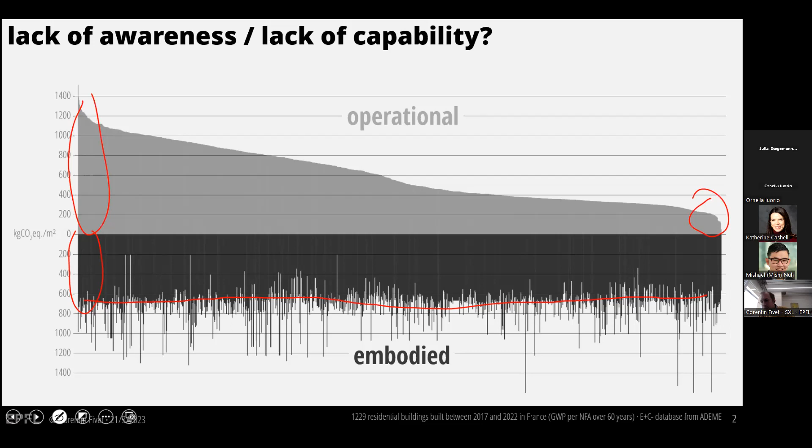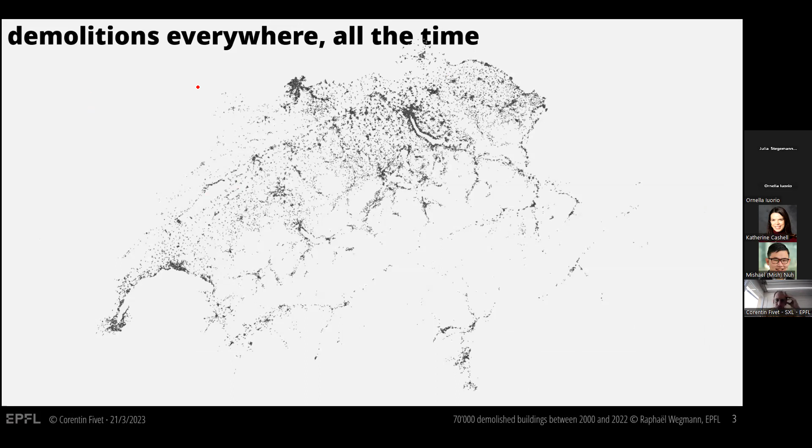We are demolishing buildings for various reasons, all the time, everywhere. This is just a map of all demolitions that happened in the past 20 years in Switzerland, which accounts for 70,000 buildings. And the big issue with those demolished buildings, besides the fact that, of course, it generates waste, and that's becoming an issue.

What's annoying with those demolitions is that we are demolishing those buildings because we don't need them, not because the materials have degraded. So we don't need the space those buildings offer at that location at that point in time anymore, but the materials are still of very good quality.

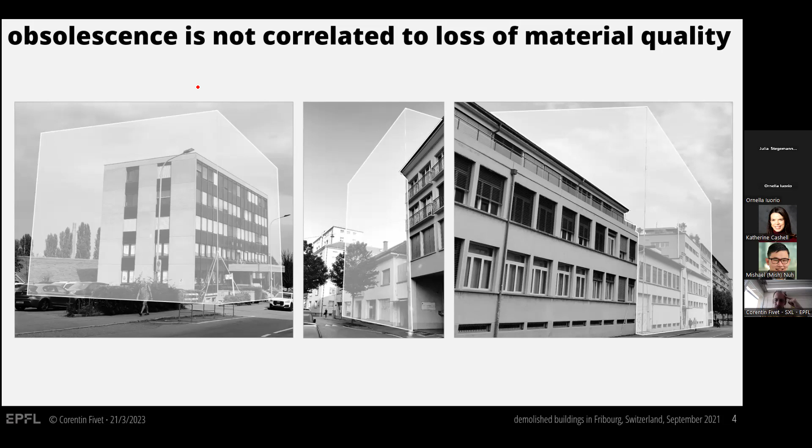The slabs, the beams, the columns could still perform for a longer time, and that's the main issue addressed through reuse. Since you work on circularity, you know what I mean here—it's not about recycling and remanufacturing a new material out of existing waste. It's really about reusing the components, the pieces, as they are given.

Here is just an example showing that. It's a bridge that was built in 1810. A century later, the city decided to replace it with a bigger, taller, wider bridge. A few months later, monks from the village nearby reclaimed the posts and beams from this bridge. Those posts were reclaimed to build the barn we see at the bottom of these slides.

If you look at the cuts in the columns, those are the precise cuts that were needed once the posts were in the bridge. That was a few months later, and this barn is still standing today and still in use. So what we have today is a 100-year-old building made with 200-year-old components.

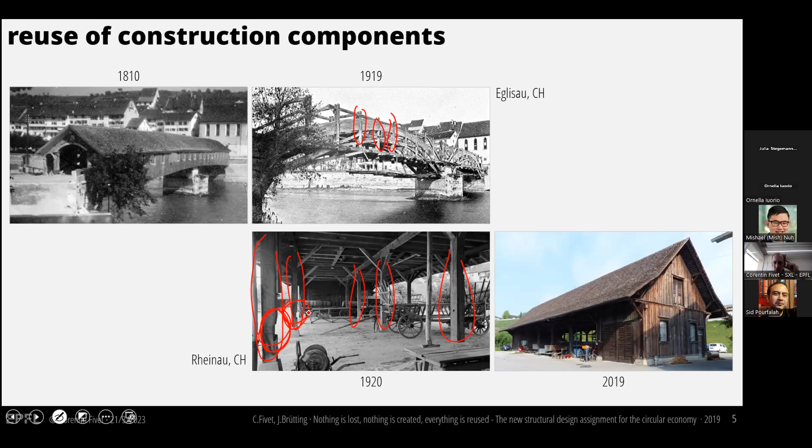And that's really the spirit of reuse—to have building materials that last longer than the buildings they are part of. We know the space requirements evolve over time, so there will be a need to transform, demolish, replace, or adapt buildings, but that's not an excuse to discard the materials inside those buildings.

So here are some close-ups with those marks. It's also very interesting in terms of heritage, because we can actually see the traces of previous uses, and the materials tell a new story, a different story that goes beyond the lifespan of the building.

When you reuse, of course that brings a few environmental benefits, and here are just a few of them. We've shown with recent studies in our lab, and other researchers have found similar numbers, that reusing components can save up to 70% of greenhouse gas emissions compared to a new product—especially true for load-bearing components, the heavy, large ones.

Reuse in Switzerland could also avoid up to 40% of waste. It's only 40% because 50% of that waste is actually soils moved from one site to another—those are not reused, and that's why it's 40% here and not 80%.

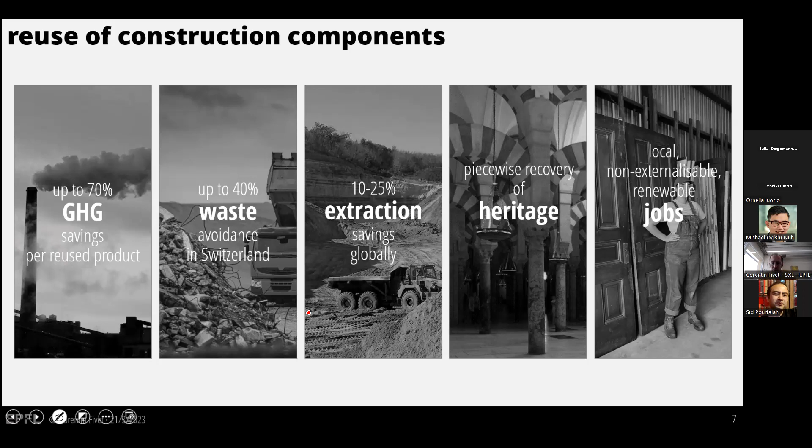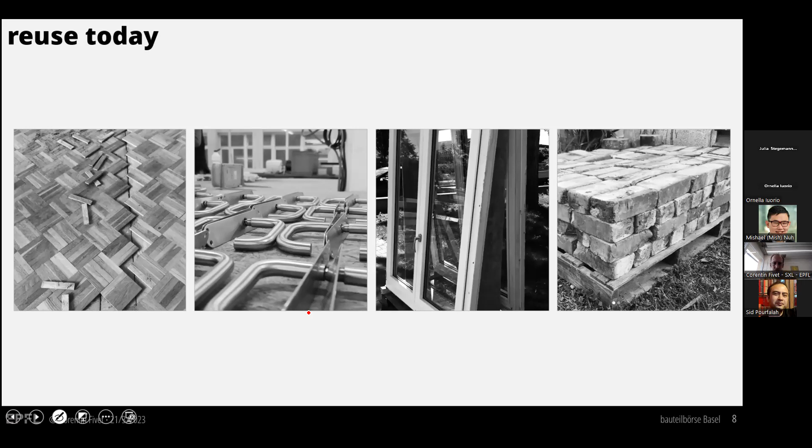Today, reuse in architecture mainly considers non-load-bearing components, the easy materials to reuse, but those are not the materials that will allow us to save CO2 emissions. If we really want to reduce CO2 emissions, we need to reuse load-bearing components.

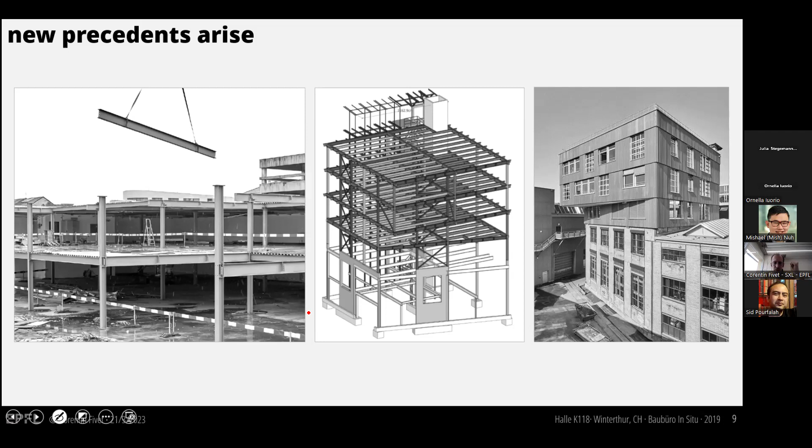There are more and more examples of applications, but it's still a niche practice. Here is an example of an extension done 2-3 years ago in Switzerland, where the full steel structure has been reused for the extension. In the structural exploration lab that I'm leading at EPFL, we are working on showing how reuse could be more implemented and also optimized.

We look at it from a design point of view, because for designers, reuse implies a change of paradigm. In conventional design, designers would first start with the shaping of a general form of the structure, and then little by little, after subsequent structural analysis, have a precise understanding of what should be manufactured and with what properties.

So what should be the lengths, the materials, the compositions of the materials in the structure. Now, if we start from a stock of materials to reuse, the story is different, because the materials are given. We know the geometric properties of the materials, we cannot change the materials, and their mechanical properties are given. So the design challenge now is to find the best structural shape that would reuse those components.

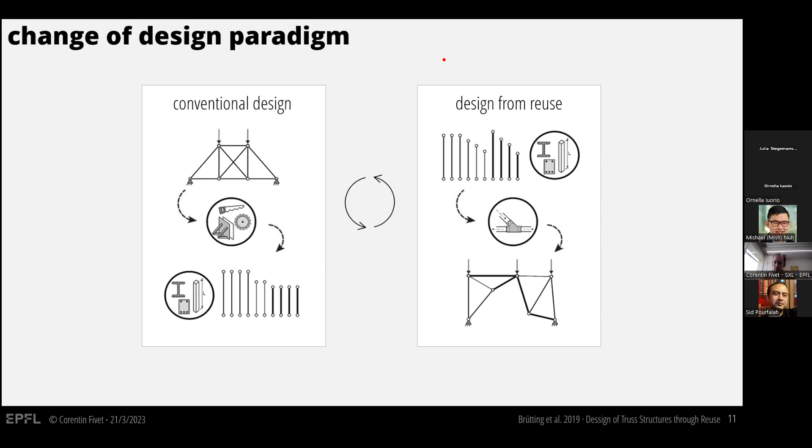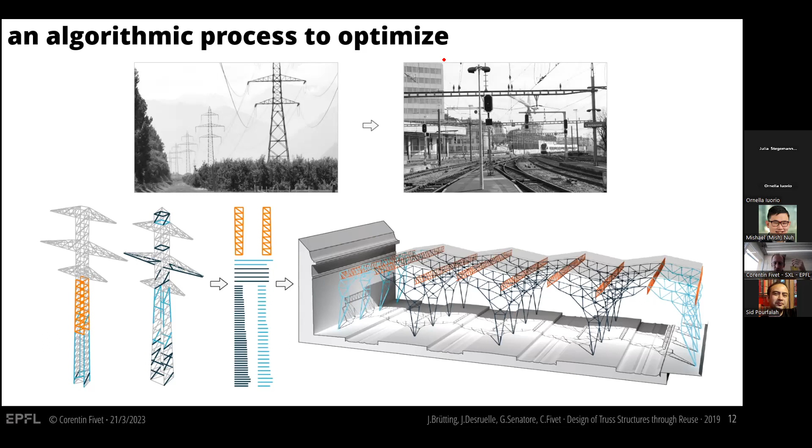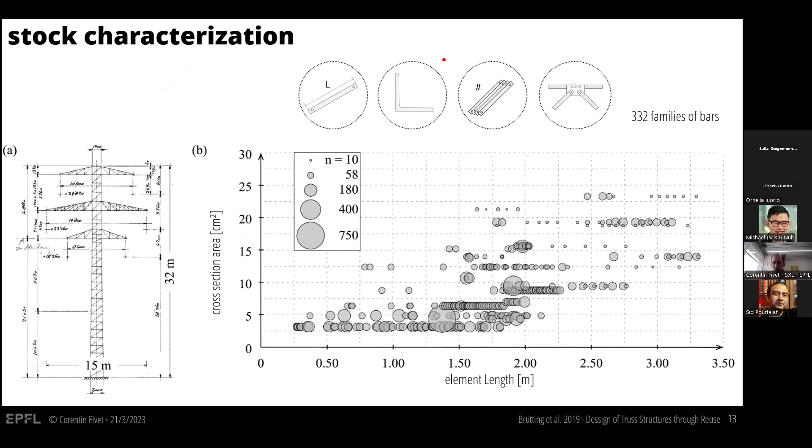All this could be transformed and written down in a mathematical way, and so could be optimized, which is actually useful because in reality, every time we are reusing, the pieces that we can reuse come from are very diverse. So it's not like we have 200 times the same components.

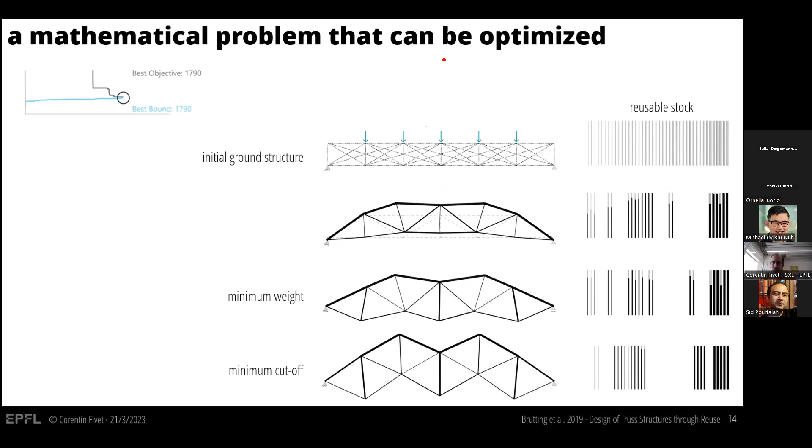As I said, the problem could be optimized, and we applied regular optimization algorithms that we actually adapted to the question of reuse. So starting from ground structures, we can optimize for minimum weight, but also for minimum cutoff of the members - how to minimize waste, for instance, but also how to minimize CO2. Those are algorithms that can be used for trusses, but also for frame structures like this one.

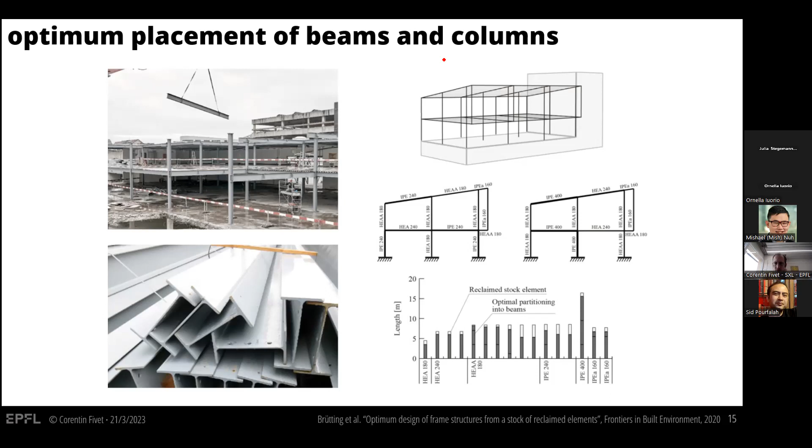What's interesting is that all the time, in all case studies that we are implementing, we are always showing huge environmental impact reductions - in a range from 40 to 60% compared to, for instance, if the structure was in steel, compared to recycled steel.

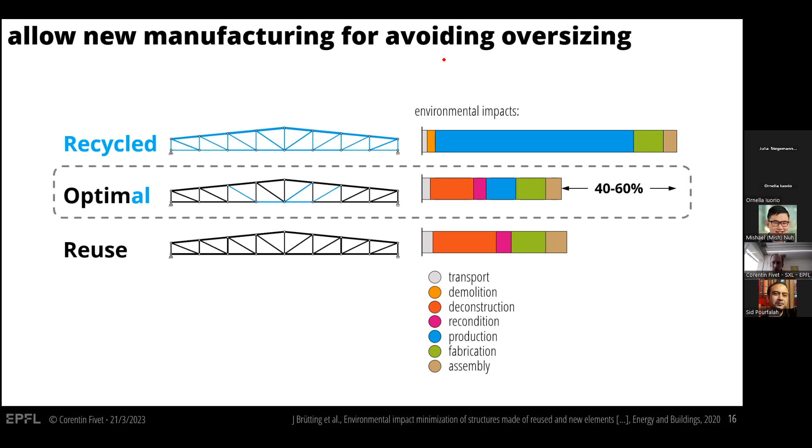What this graph here is showing is that if we really want to reduce the environmental impact to a minimum, the goal cannot be to reuse 100% of the members - we should allow some members to be manufactured for their proper use. The reason is that when we reuse, we cannot optimize the cross sections, so every cross section is a bit oversized, and that increases the weight. It's not optimum for transport either, so those members that are too oversized should be replaced with newly manufactured material.

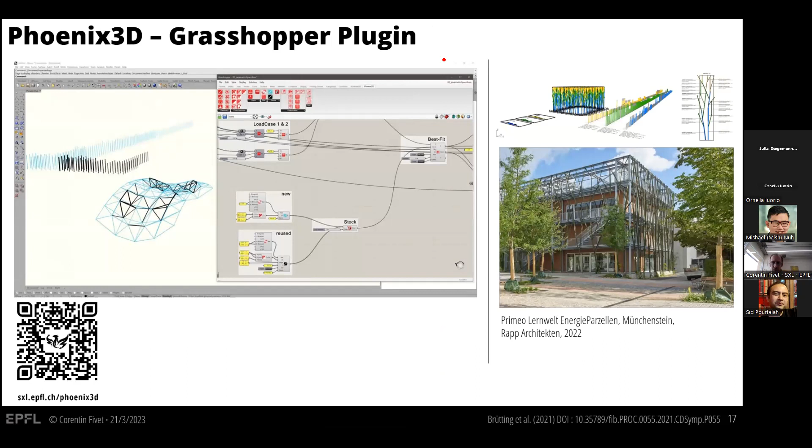All right, so the second part of this presentation is about concrete. It's the big elephant in the room. Production of cement, as you may know, is responsible for 8% of all CO2 emissions worldwide, and concrete waste also represents up to 30%.

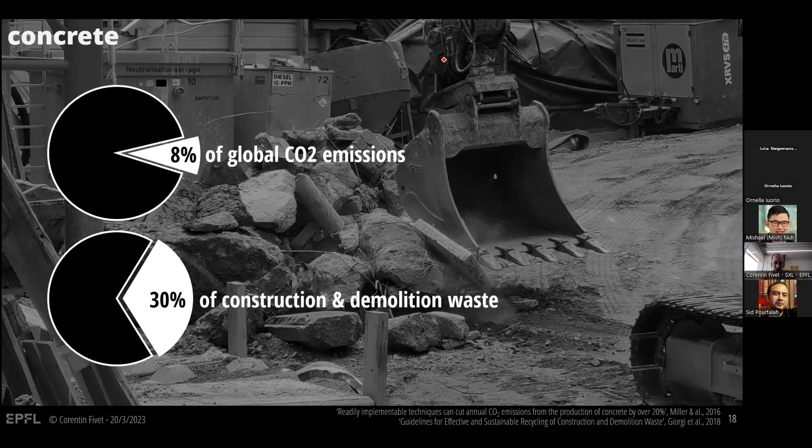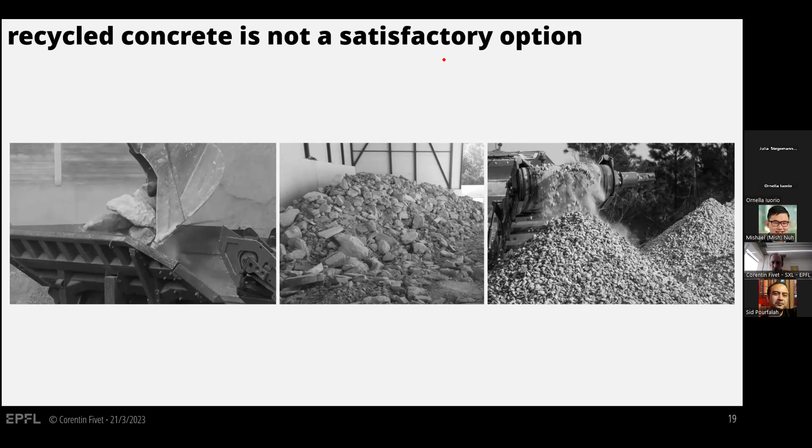We have to find a way to reuse concrete. Currently, the best end of life for concrete, as most of you probably know, is to recycle the aggregates in new concretes. It's great because it avoids the extraction of natural aggregates, but it doesn't change anything in terms of CO2 emissions. So what we are suggesting here is that before we crush the concrete, we actually operate a clean deconstruction, employing, for instance, diamond saws, as we see here. Those are techniques and technologies that already exist and are used on a regular basis, mainly in densely urban areas.

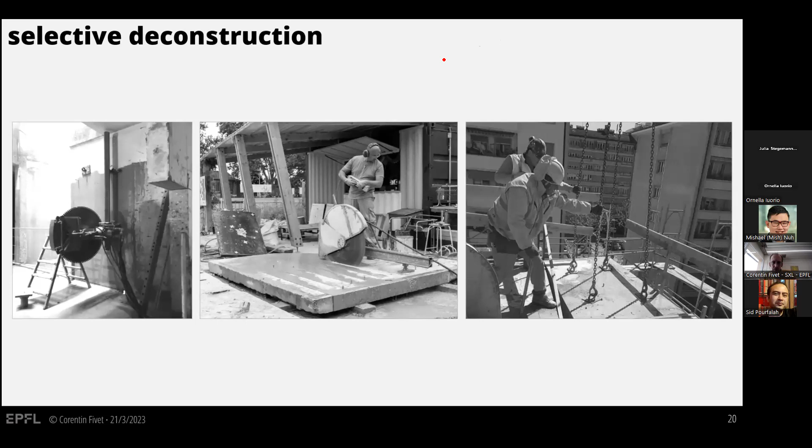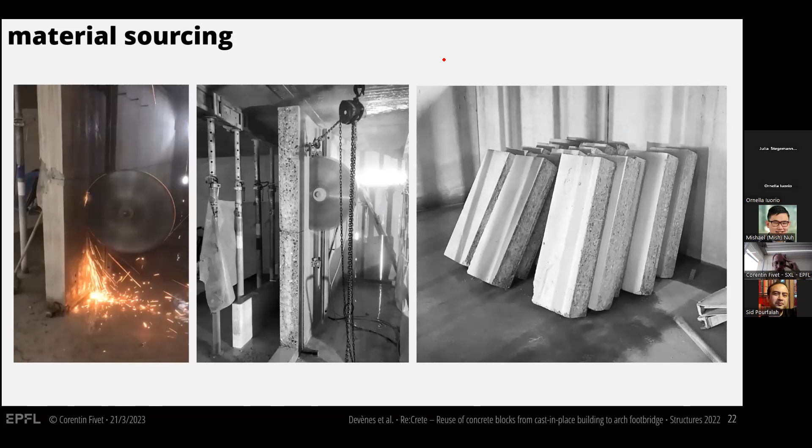They had to remove walls from the basement. So we gave the dimensions of the pieces we wanted, and we cut them, and then we drilled holes inside those blocks in order to have enough room to put a post-tensioning cable. Again, a similar story - whenever we want to reuse the blocks here, they all have a different geometry.

So there is inaccuracy. You have different dimensions because of the way the concrete was cast 15 years ago, but also because the casting itself is not precise. And drilling the holes, and the position of the holes, is not guaranteed either. So there is a variety of dimensions.

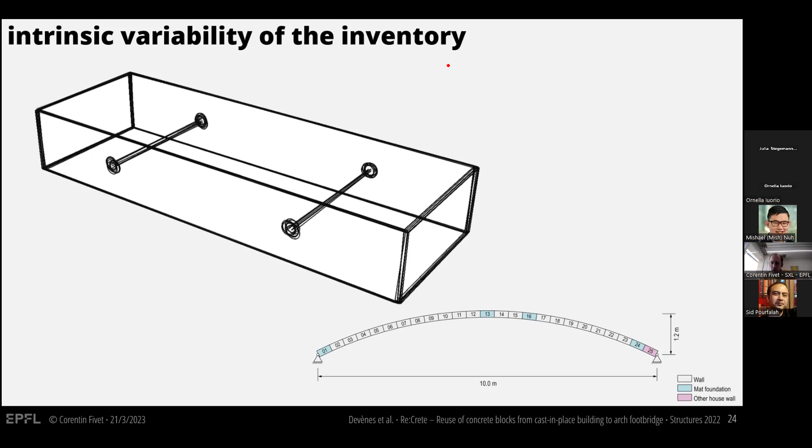This cannot be avoided, but we can anticipate it. As designers, we can make sure that the blocks are ordered in a particular sequence, such as to minimize the variations between any two blocks that are next to one another.

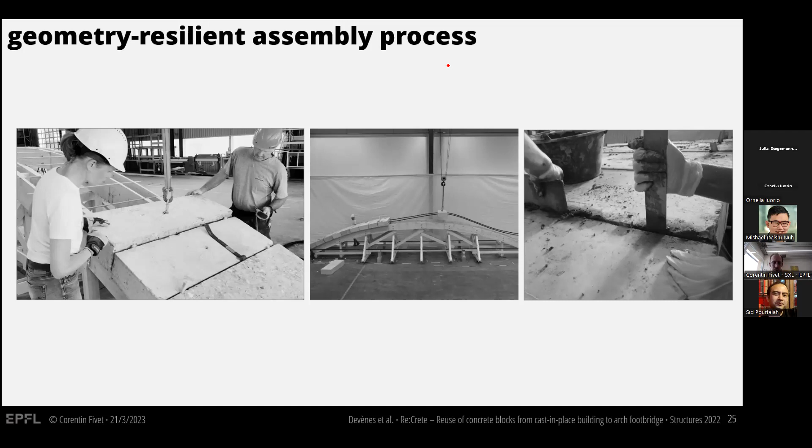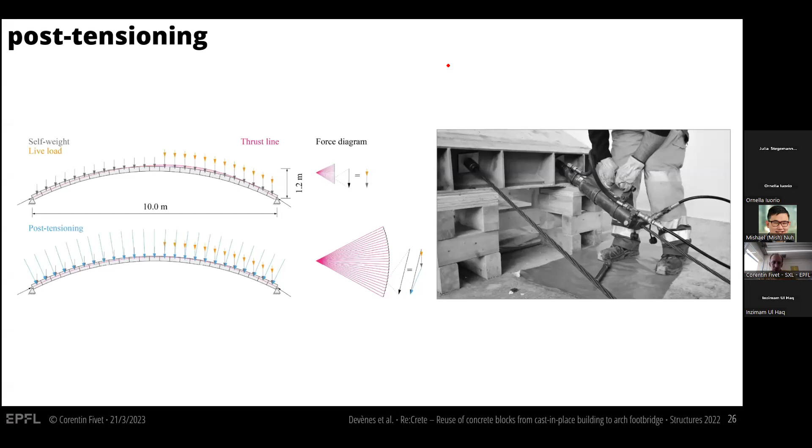So here are some graphic statics diagrams for Ornella. We used this for sizing the post-tensioning cable inside the arch, making sure that the arch works in pure compression all the time.

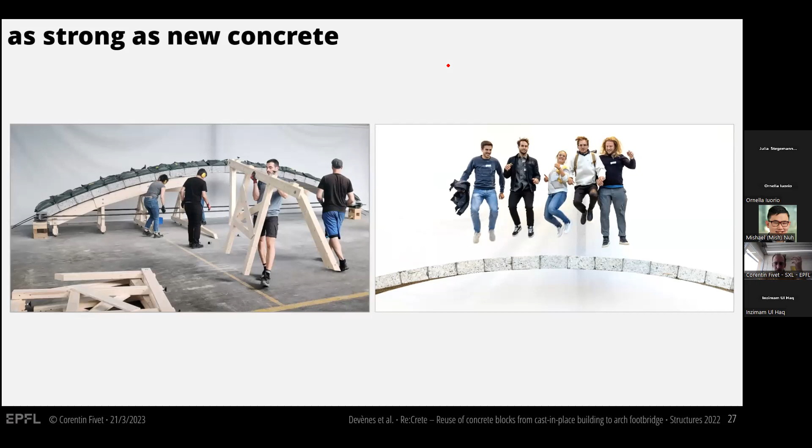In the end, what we have is a concrete footbridge that is just as strong as new concrete. So we have all the nice qualities of concrete, but we didn't cast any concrete in order to build it.

Then we see that the global warming potential is just as high. Actually, our recrete arch was not that optimized, because what takes the most in this LCA is the impact related to the construction of the formwork—the timber formwork that we used to put the blocks onto.

And that formwork was made out of new timber, it wasn't reused, and so on. So that's a huge impact.

The other big source of impact is related to the transport of the pieces, because there was something like 70 kilometers from the demolition site to our facilities.

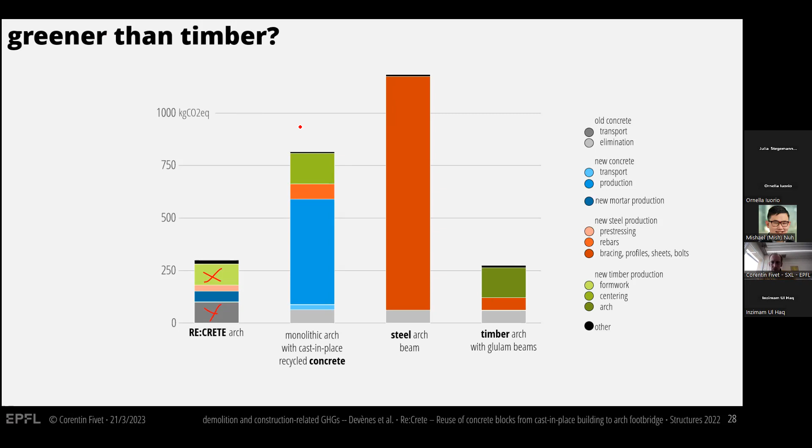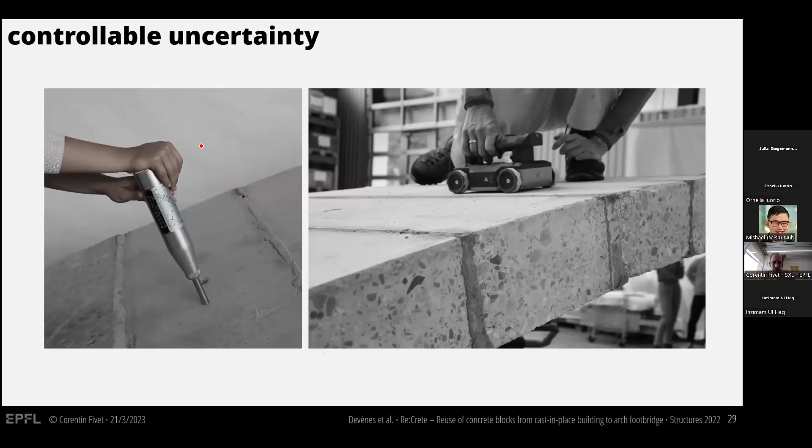Again, we don't know everything about those pieces. We don't know with precision what type of concrete it is, or if there are rebars in it. But using existing tools and assessment methods, we can actually have enough confidence to build this bridge.

What's also interesting is that to make it work, we had to work with three companies that usually don't work together. The first is a demolition company, the second a construction company, and the third a structural maintenance company.

So those are three different fields in structural engineering that are usually separate and work in silos. Here we show that to reuse those pieces, we have to bring the expertise from these three different fields together—demolition, construction, and maintenance people.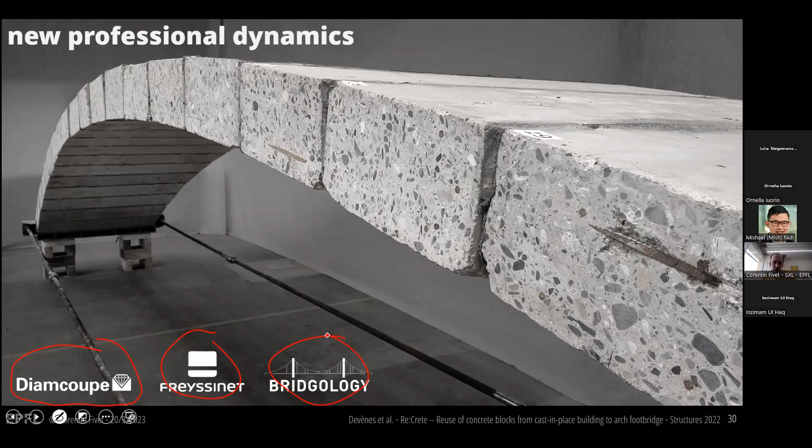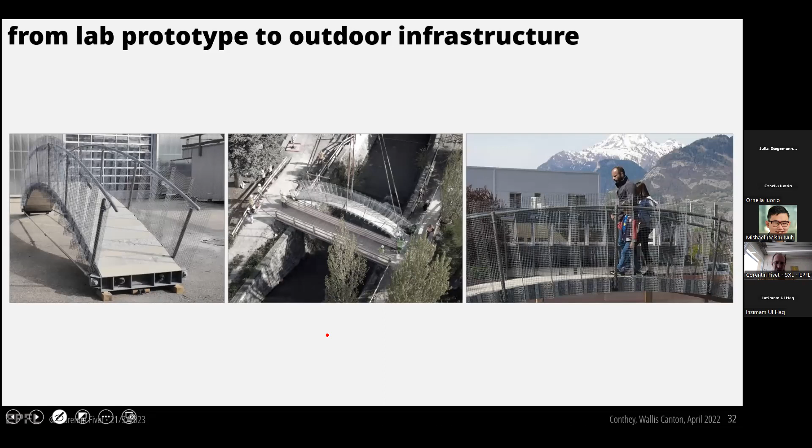Later on, we also improved the footbridge with other reused materials, and now the bridge is actually in use in the Alps in Switzerland, to show and prove that the concrete reacts well even when used outdoors.

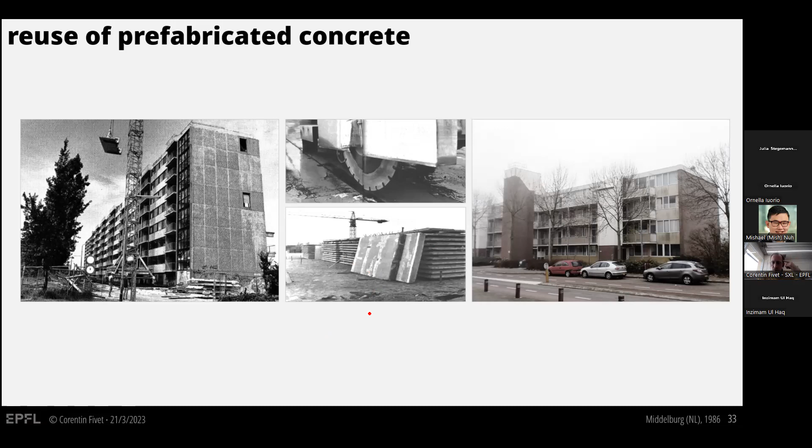After that, we knew this wasn't the first application of reused concrete, but we wanted to know what was out there, what was done before us. We identified many applications of reuse of prefabricated concrete—for instance, one where the building on the left was fully dismantled to build the new buildings on the right, back in 1986.

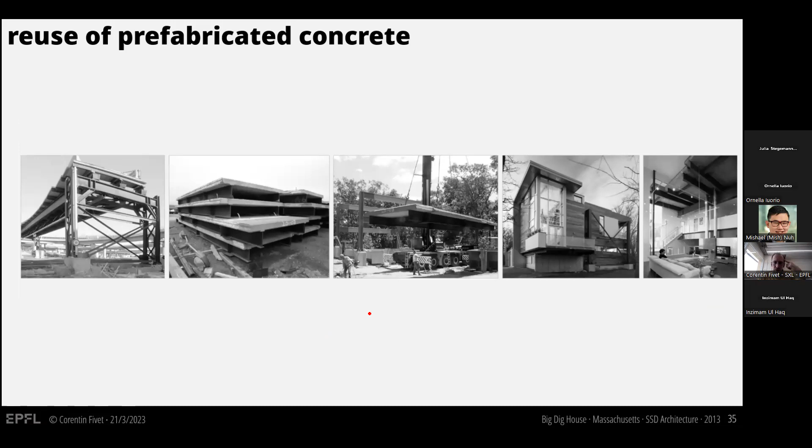This is a recent paper, and I'm showing it because whenever we had records related to the environmental impacts, they showed that it made sense, more than sense, to reuse concrete. Compared to conventional construction, you can see savings of between 40 to 90%.

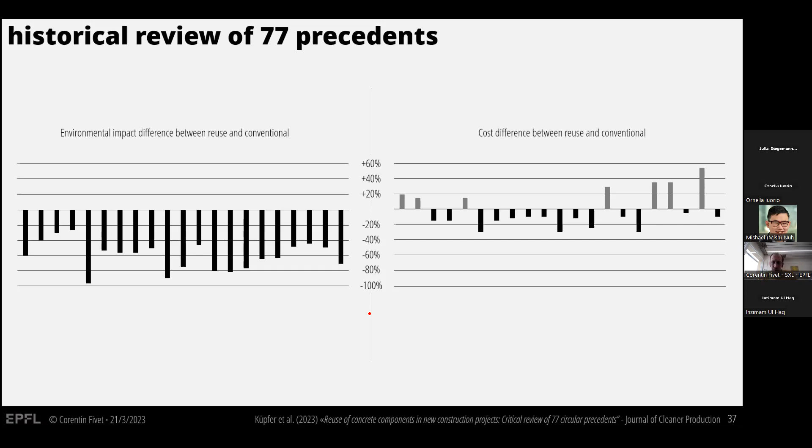Also important, of course, are costs always. So this is what you see on the right-hand side. Whenever the cost comparison was recorded, in some cases it was beneficial—people made money by reusing concrete. And in all cases, this is when the people building the new building are also owners of the building to demolish, so they can optimize the logistics and also don't need to pay for the waste out of the demolition building.

I have a few slides here. This is a recent study made by a master student here at EPFL, where she wanted to see how we can optimize the cut of slabs in order to reuse them and build a new building. The footbridge I showed was the low-hanging fruit—we used the compression strength of concrete, but we didn't reuse the rebars. Now, if we want to reuse the slabs, we have to also reuse the rebars inside those slabs, and the question is a bit more complex.

What we have here on the slide: you see the two source donor buildings on the left, and the colors that we have here characterize the bending strength of the slab parts. Every color means a different strength in X, Y directions, and that's because of the reinforcement bars present inside those slabs.

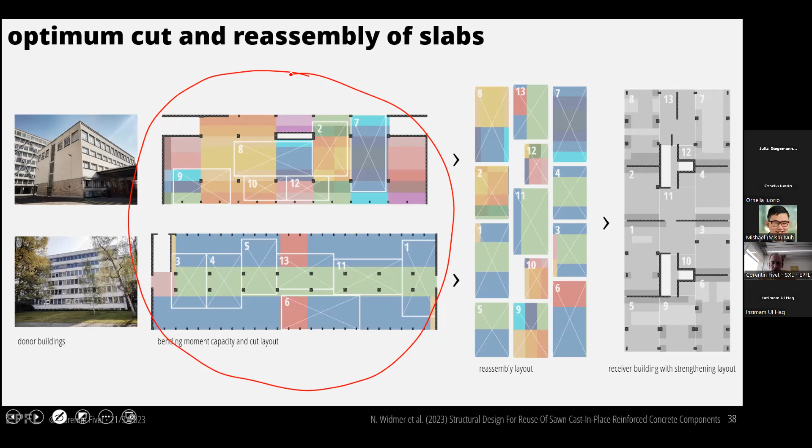On the right we have the new buildings, and the goal of the optimization algorithm was to find where to cut those slabs, how to rearrange them, how to flip them if needed, how to rotate them in order to build the new floor we have on the right, while minimizing the additional strengthening we would put on those slabs.

The idea was, wherever needed, to add an extra layer of ultra high performance fiber reinforced concrete—those are the shades in gray we see on the right—in order to make sure the old slabs could withstand the new loads in the new buildings, as well as the new spans we have in the new building.

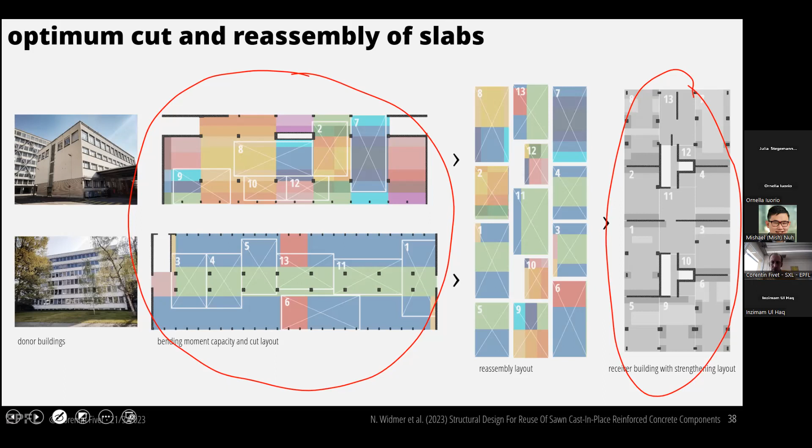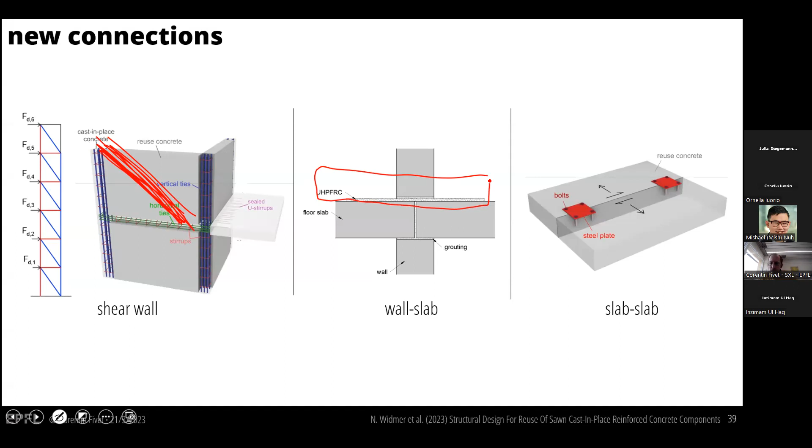Additional to that, there is a need for developing new construction details. We also made sure that the bracing system on the left could reuse walls, with diagonal compression struts in the walls, and then the strengthening I was speaking about in UHPFRC, and shear connectors in between slabs on the right.

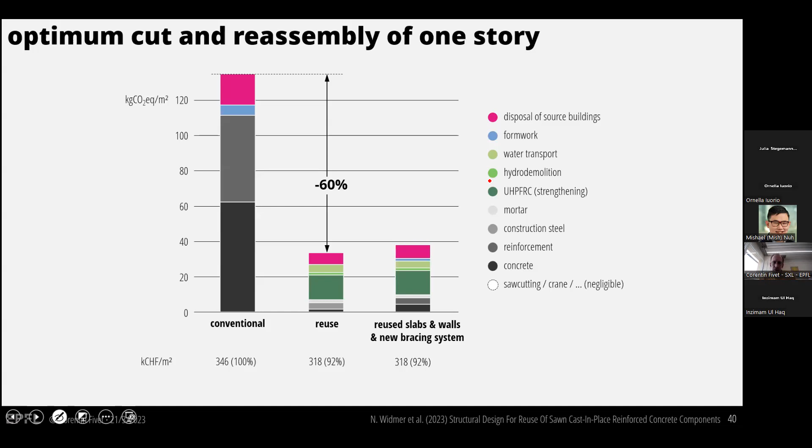If we do a life cycle assessment and compare one story made of reused slabs, walls, and bracing system with a conventional system, we see savings of up to 60% in terms of global warming potential.

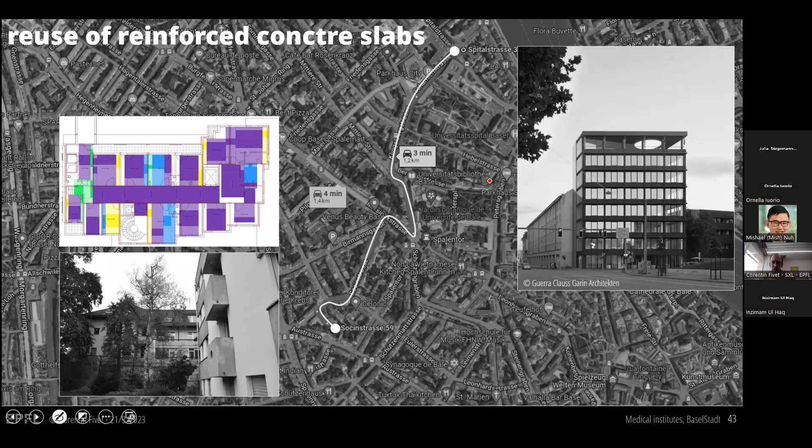All right, so this is it. I'm happy to answer any questions you may have. Thank you very much.

Thank you very much, Corentin. Excellent presentation. I think there is a lot that you have discussed, and I'm sure there will be questions in our chat. So if anybody wants to raise their hand, we can discuss with Corentin.

Okay, so there are no questions. Okay, Bruno, do you want to speak up? You are in another place. Okay, yes, I can read it.

So the question is, Bruno's question is related to durability. I showed that some assessment was made on the concrete, rebound hammer and so on, but he wonders if any other evaluation or characterization was made. Also, will the service life of these elements be the same as a new one?

So yes, those are questions that I didn't address at all in this presentation, but we have a strand of research directly related to that. And maybe I have it on the next slides. No.

And so my question is a bit cheeky, because in a circular economy, things are supposed to be in cycles, infinite cycles, ideally. So do you see these elements as having another life after the new reuse?

Yes, sure. So, for the example where we put UHPFRC in order to strengthen the pieces, we're going to have a hard time reusing those pieces again. Or at least we didn't address that question at the time of design.

For the other example, the last one where concrete slabs would be put on top, as simply supported slabs on top of two reused steel beams, this is a fully reversible system. So those pieces, in 10, 20, 50 years from now, can easily be disassembled and reassembled in new layouts.

So yes, every time we design something new, of course it should be done following design for disassembly methods. But currently, we believe that most of the focus should be on reusing the existing waste, because even if it's not reused and reassembled in the design for disassembly way, it means that we are avoiding the manufacturing of new materials. So any waste that is reused is something good, it's something to do.